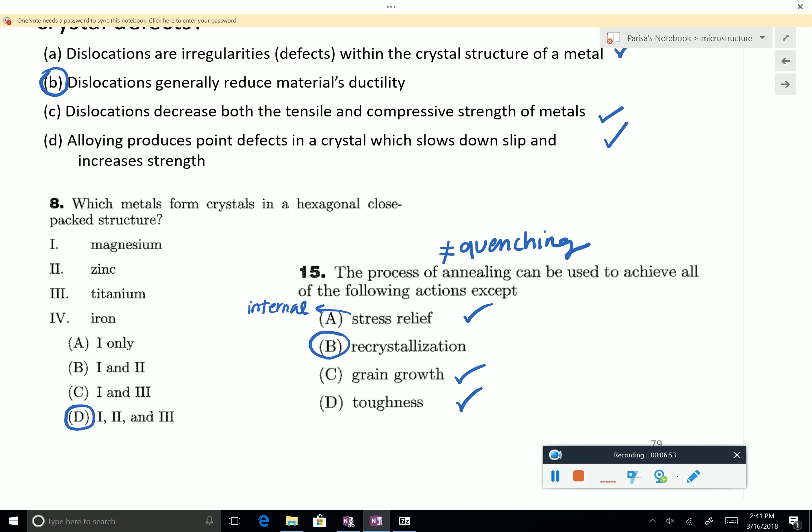And these are from the FE exam again, these questions, the materials section. Any questions about this small kind of quiz, these questions? Okay.

So we can move to steel. I told you that from today on, basically each packet will be on a different material, which matters to us as civil or architectural engineers.

From now on we can rely more on the textbook, because we're moving more from the science part of the course to the engineering part. Chapter 3 of the textbook, plus the additional reference on the syllabus and chapters 9 to 11. I had asked you to watch a video on steel production, so we don't spend too much time on the details.

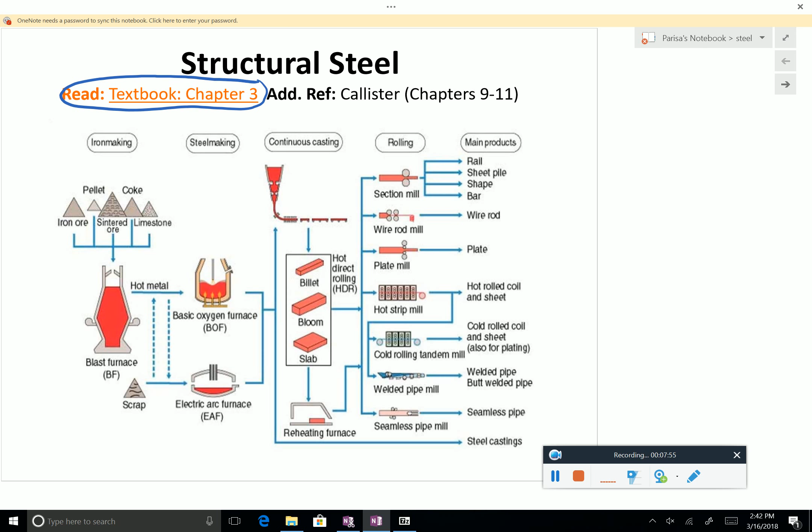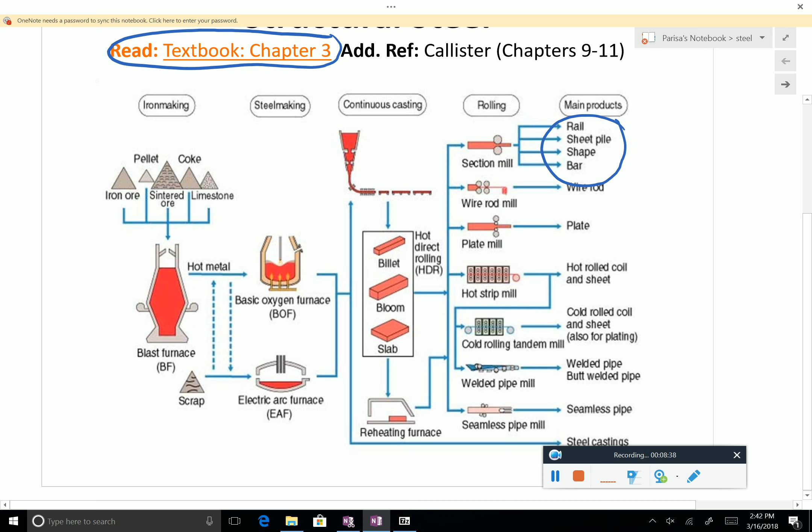This is a diagram which summarizes steel production. The first step starts with the raw material, iron ore. You enrich it to get high carbon pig iron, then change pig iron to steel, and afterwards make steel products. There are different ways to do that, and the types of products we're interested in are mostly made by hot rolling, as you can see here.

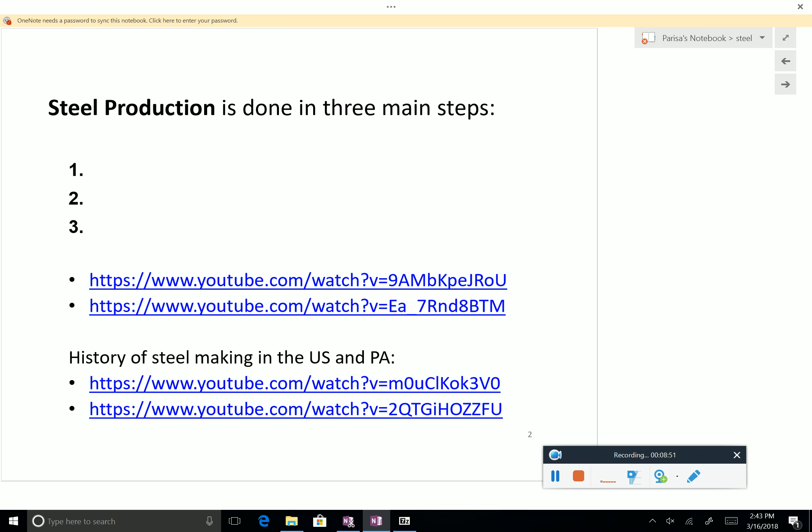So if you want to summarize steel production, you can consider 3 steps. I don't know how you categorized this in the diagram you submitted, but these are the 3 steps I see in production: you start with the raw material, iron ore, then enrich it to get high carbon pig iron, then refine the pig iron, reducing the carbon to go from pig iron to steel, and finally you make the product.

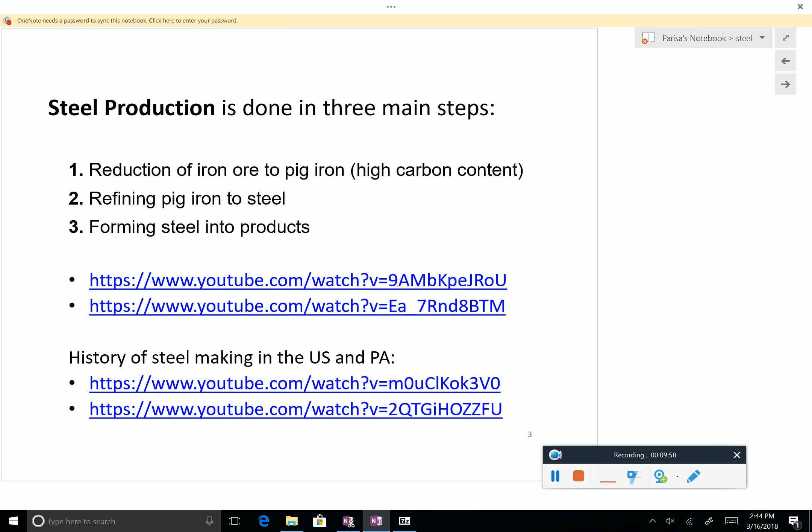So now we look at each of these steps a little bit, very briefly, so we have a good summary.

The first step is going from ore to pig iron. You increase the iron content to about 65%, and this is done using coke or coal in a blast furnace, as you saw in the video, in order to release the iron.

Another important aspect you saw in the video is the use of limestone powder, so pay attention to that. It's used to trap the impurities, which are skimmed off the top of the molten material, and then the molten rock at the bottom is collected. This is a summary of the first step.

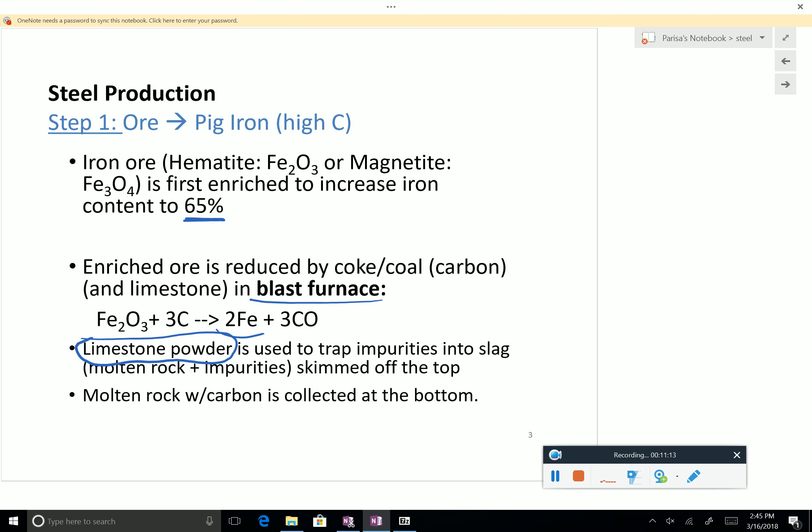The second step is basically reducing the carbon in pig iron to get steel. Why do we want to do that? Why not just use pig iron with high carbon content? Because it's a very brittle material. Exactly—remember, the more carbon we have in steel, the higher the strength but the lower the ductility. We don't like to have a lot of carbon.

So to do that, you use a different furnace, the basic oxygen furnace. Oxygen reacts with the carbon, getting the extra carbon out in the form of CO2, and then you have steel. Scrap metal goes through a similar process in the electric arc furnace. Since you've seen the video, I hope you can visualize all of these steps—it should be easier for you.

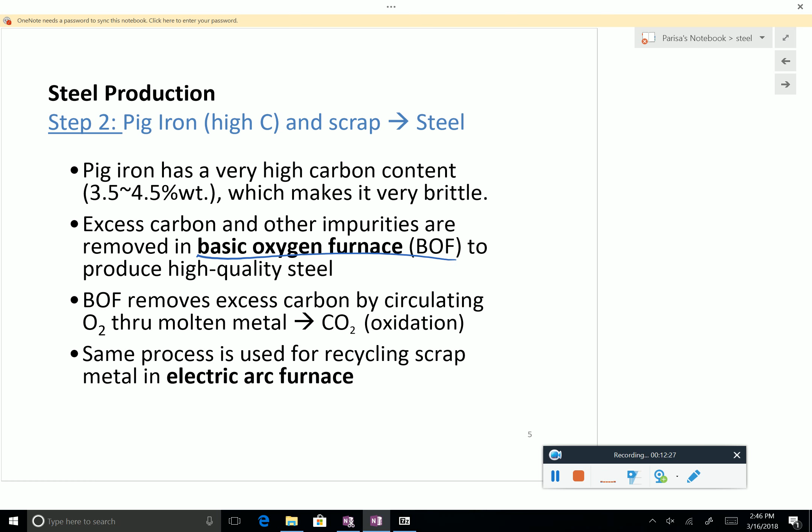And finally, you have the steel, and you need to get the products that you want. Most of the products we're interested in are hot rolled, but there are other sorts of production, which again you've seen in the video—continuous cast, or hot working.

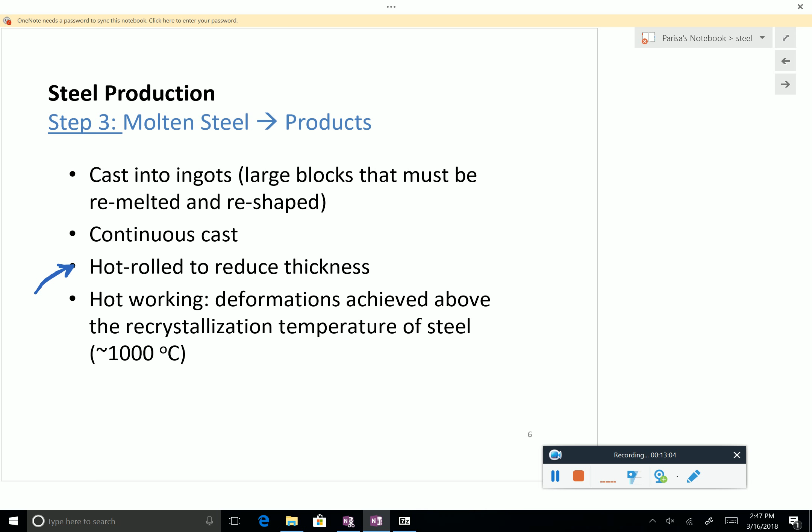So with that, we can actually move to the steel properties.

I thought it's good to ask—how many of you are fans of the Steelers? Three, four, five, six, seven. I guess the rest are Eagles fans or neutral. This semester Eagles fans are very empowered by the Super Bowl, but in any case, that also shows the role the steel industry plays in PA—just the name of the Pittsburgh team. I thought that's just interesting to note.

So, structural steel. What we are most interested in, of all types of steel, is of course structural steel, because we are either civil engineers or architectural engineers in this class. It turns out steel is the third most used construction material.

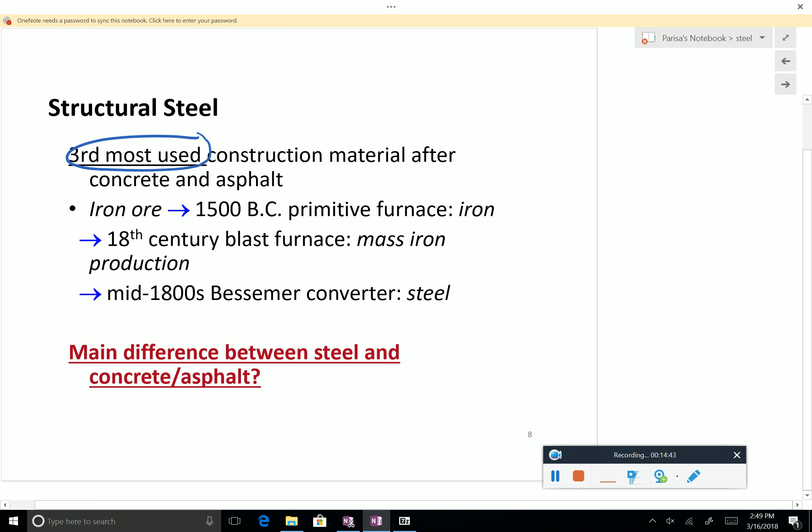Concrete is number 1, then asphalt, because there are millions of miles of road. Steel is not something new—iron ore was recognized by humans many years ago, iron played a big role in the Industrial Revolution, and steel was a later development.

So what do you think, if you compare steel as a material to concrete, let's say—what do you think the main differences are?

Let's think about construction. Concrete is a really weak material in tension, but you can put reinforcement in it. Well, it's still steel. Concrete's a lot heavier when it comes to the amount needed to produce the same amount of strength. Exactly.

Good points so far. Any other difference between concrete and steel as construction materials? Concrete and asphalt are made on site, and steel has to be made in a factory.

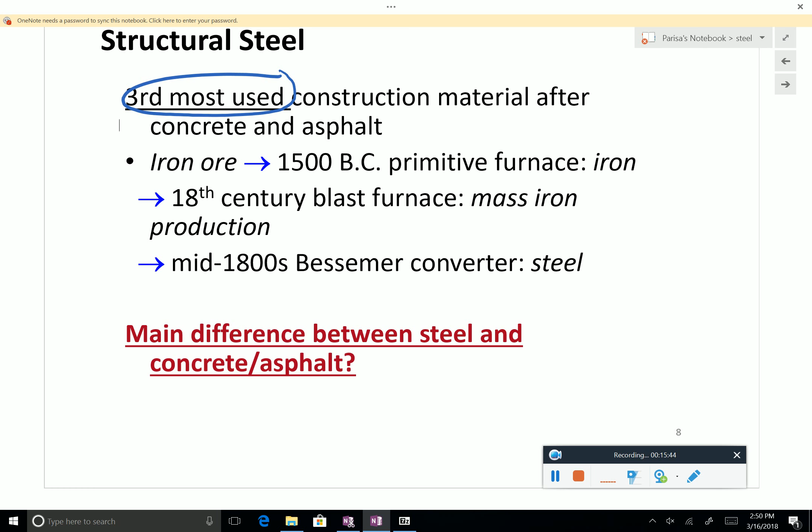Exactly. So it turns out that I was not as creative as you are. The main difference between them that I've listed here is pretty much following what your friend said. Also, every other point mentioned is also valid. One very main difference between steel and concrete is that you make them on site.

Most of the time, you can also have pre-constructed concrete elements, and these are transported, so it's off-site. In other words, as civil engineers, we can control all the properties of concrete and asphalt pretty much within reason. But steel pretty much comes in a catalog, so you buy it from a plant. In most typical projects, you cannot define or design your own steel.

So this is one major difference, but everything else you said is also valid. It's true that steel is much better in tension, concrete is weaker. It's true that there is steel in concrete. And it's also true that for the same strength, steel is much lighter, and it's more expensive also compared to concrete.

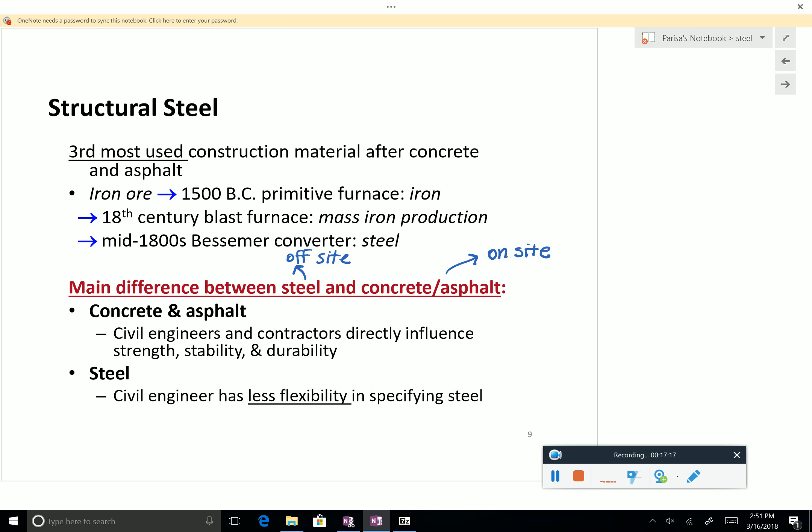In any case, steel is used in a lot of different applications in construction. I know you are juniors, but I guess you have seen girders and beams at some point in your life, maybe? So these are typically hot rolled and continuous cast steel. You are using them as load-bearing structural elements.

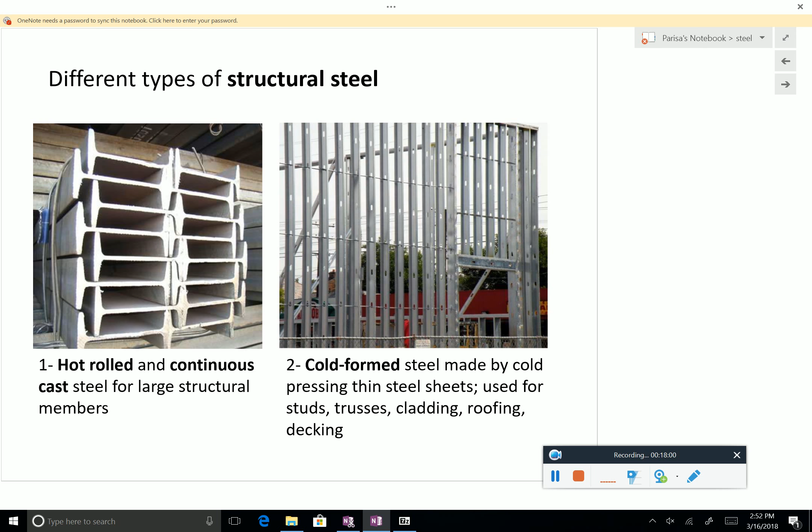And then there are cold formed elements, like this cladding, these sheets that you also use in different functions in construction. This is a building, I forgot which building. This was in construction at State College. Right now it doesn't look like this anymore, this is a few years back. So if you go to any construction site, especially if the skeleton is made of steel, you can recognize a lot of steel elements. Where else do you think steel is being used?

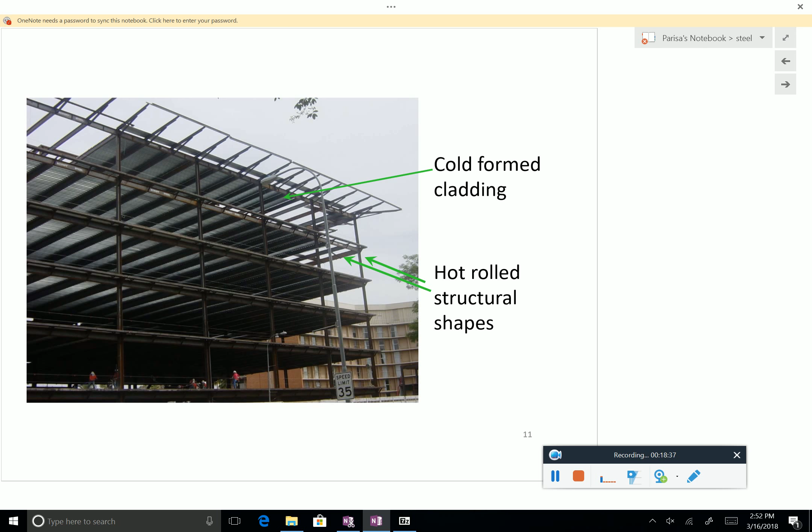A little bit less obvious. Let's say when you look at a bridge in Pittsburgh, since we have a lot of Steelers fans, you see all these bolts, and I forgot, is it an Andy Warhol bridge? You can see the big bolts when you walk over the yellow one. Is it called Andy Warhol? Steelers fans from Pittsburgh? Yes.

So fastening products, bolts, nuts, rivets, they're made of steel. We just mentioned that inside concrete, the reinforcing elements are made of steel. And there are all other kinds of steel elements which you can find in a structure. So steel is an important material.

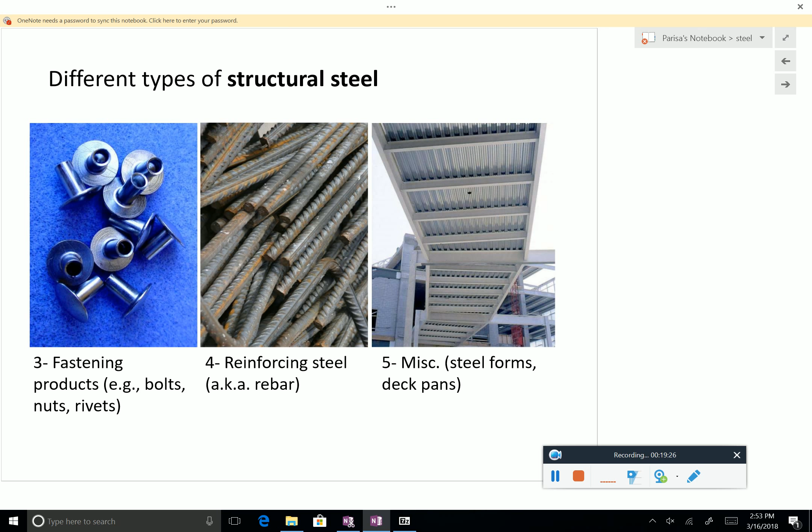One thing that everyone in this class has to know is that steel is an alloy of which two materials, namely? Iron and carbon. So we all need to know for the rest of our life that steel is an alloy of iron and carbon. You will see that there are some other alloying elements, but they're at lower percentages depending on the application, but this is pretty much it.

Because, why? Why we don't like to use very high carbon steel in the structure? Yeah? Exactly, because it's brittle.

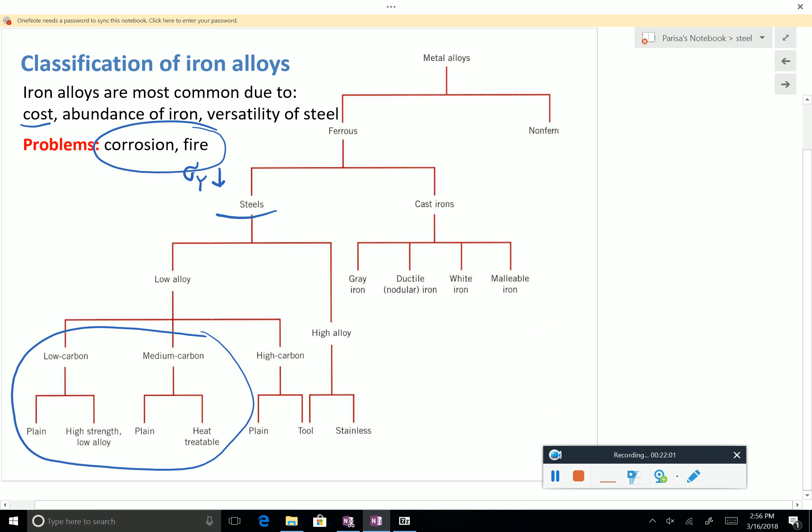Exactly, you use yield strength. So the yield strength becomes very low at high temperatures, and then the material can fail. So these are the two main issues with the steel.

So the main sentence is steel is the alloy of iron and carbon. If you have higher carbon, will steel strength be higher or lower? I'm emphasizing higher. Ductility? Lower, exactly.

And how about modulus of elasticity? It turns out that modulus of elasticity doesn't change much if you change the amount of alloy. The reason is the amount of alloy is very small, so it doesn't really change the interatomic forces as much. So the modulus of elasticity stays pretty much the same.

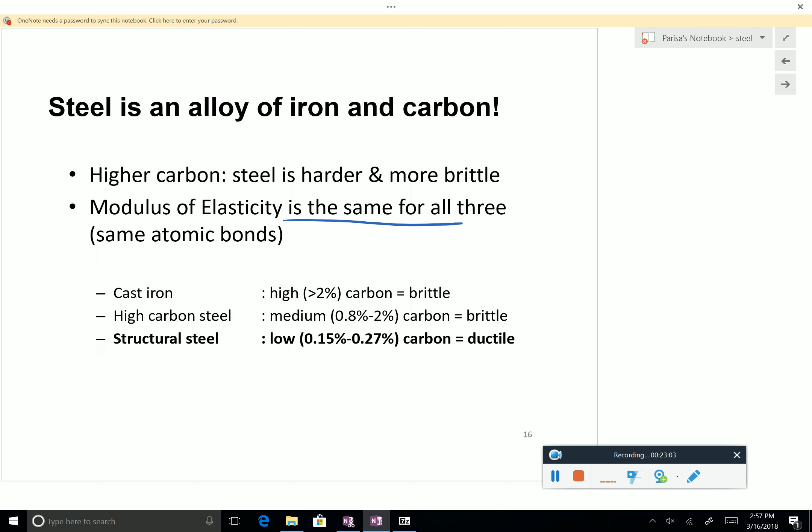Here in the side note, we'll get back to this again, but just remember to have an idea. Structural steel has a very small amount of carbon, less than 0.3% carbon, and it gives the ductility. If you have more carbon, the material becomes more brittle.

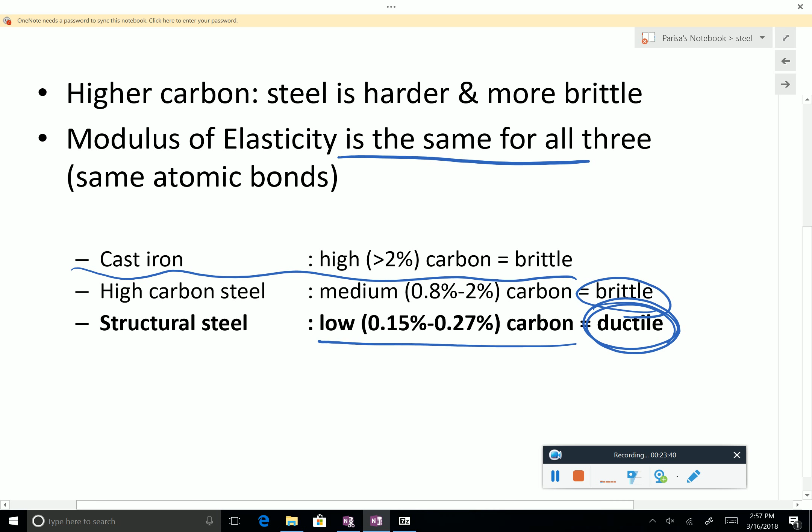And cast iron, you may have heard of it. Cast iron is very high carbon, very high strength, low ductility. This is just to remind you why we are going to have the same elastic modulus, because these interatomic forces are not going to be that different.

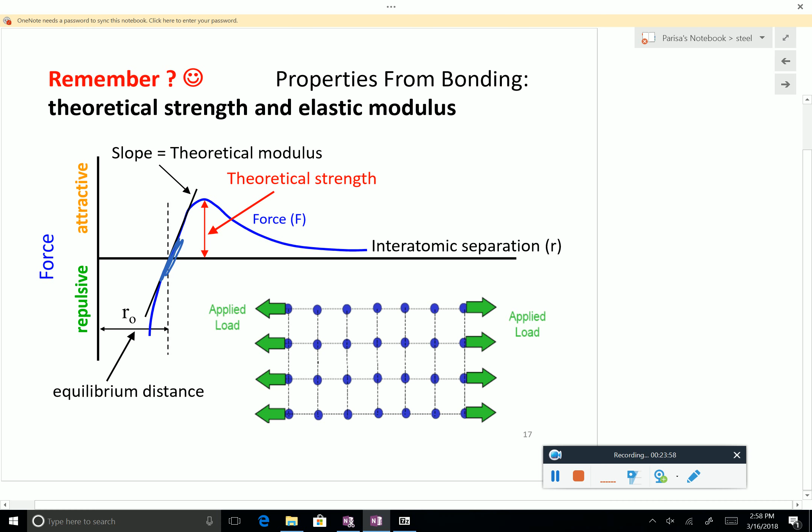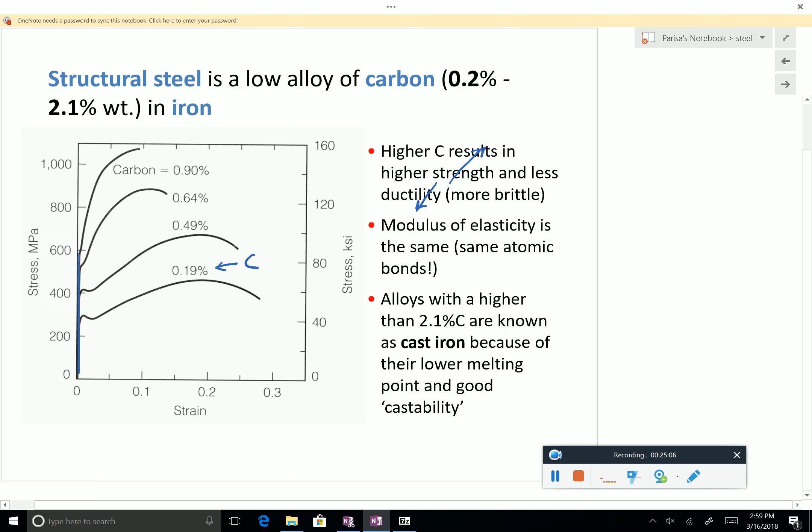So I thought we could do a simple exercise together. Imagine I ask you to draw the stress strain diagram for two steels: one has 0.1% carbon, the other has 0.6%. We know three things: modulus of elasticity is the same, higher carbon means higher strength, and higher carbon means lower ductility. So let's see if we can draw these two diagrams. There is a reason I'm asking you to do that, and try to make sure you are showing the initial part nicely. I want to see how you draw it.

Talk to each other, please, don't work alone, discuss it.

Joe, are you just drawing? Draw a stress strain diagram for two carbon contents. Imagine I asked you this on Monday. Very probable. Just qualitatively, how would the stress strain diagram look like? I'll try to show the beginning a little bit better than in this.

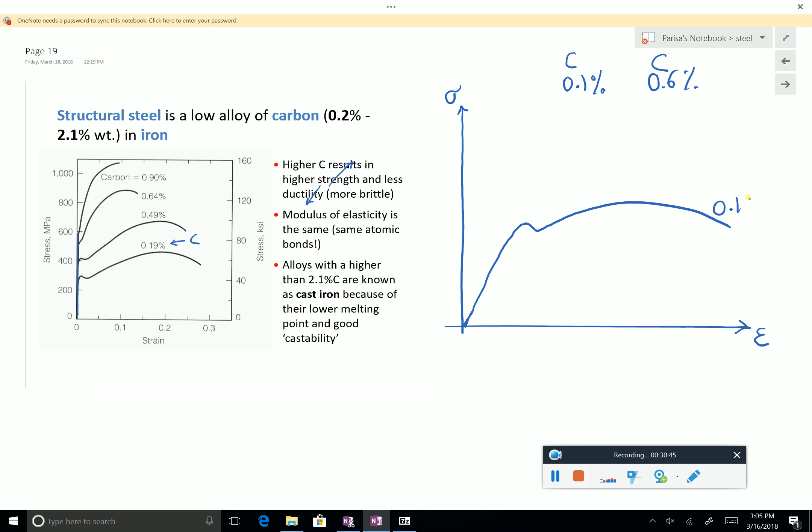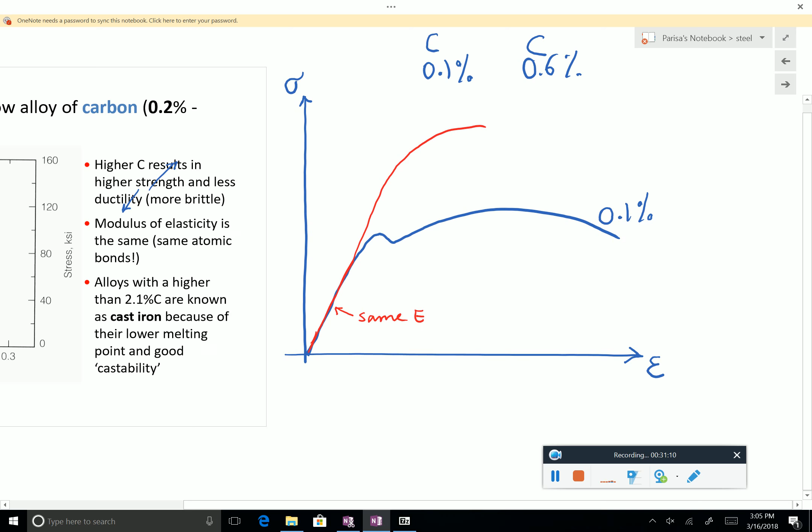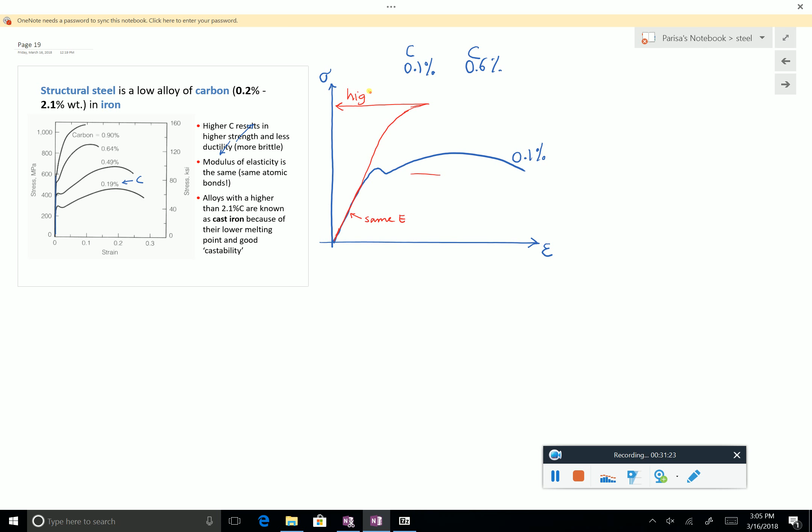Great. So if this is 0.1%, it's relatively low carbon, so you have a nice curve. The reason I wanted you to do this is that this means they both have the same elastic modulus, pretty much. This one has higher strength and lower ductility. Why is it moving?

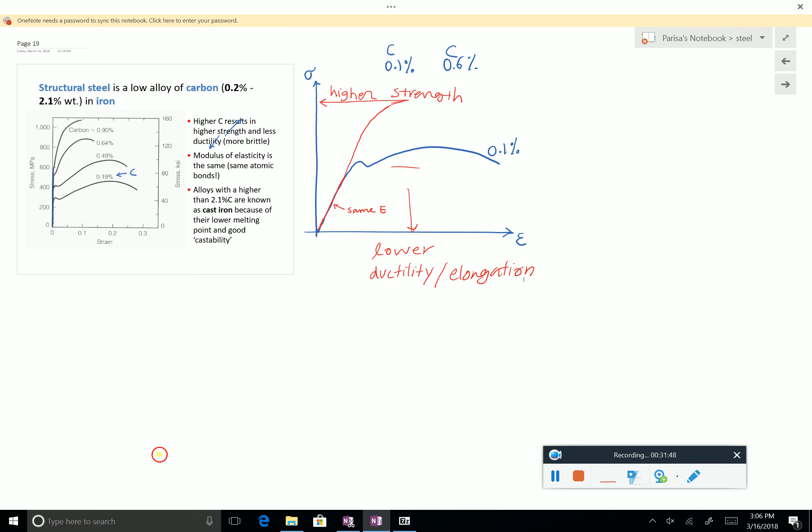Okay, so yeah, the reason I wanted you to make this plot is because this beginning part is not really clear, and it's kind of important when you see these three differences between the two cases.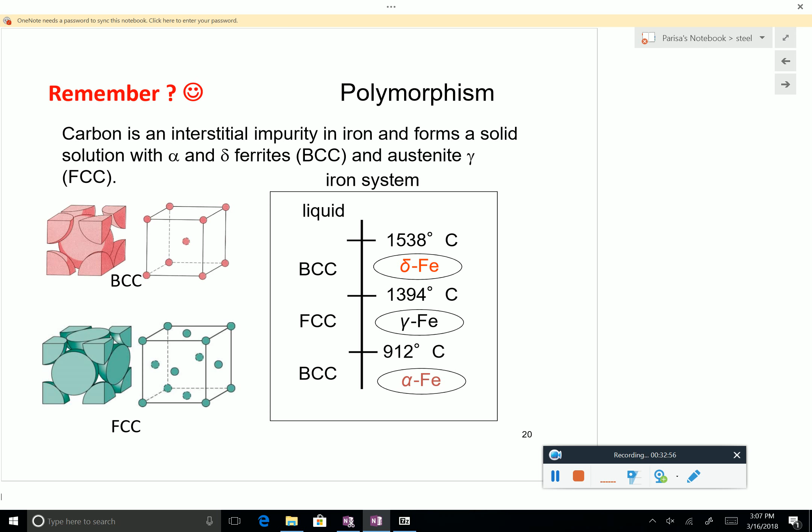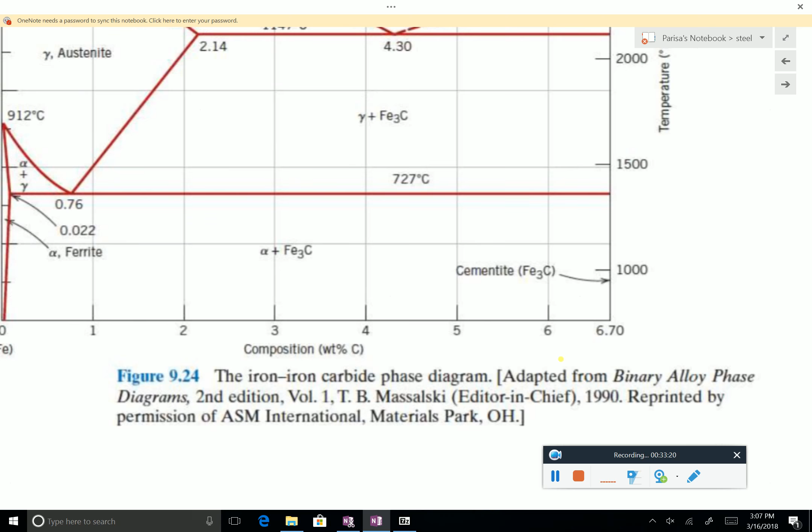Now, there is a concept I'd like you to pay close attention to. It's very simple, but it's kind of maybe very new to you. It's called a phase diagram. People have developed these diagrams to see, for a certain amount of alloying, let's say here carbon, at what temperature what type of phase we have in the molten mix.

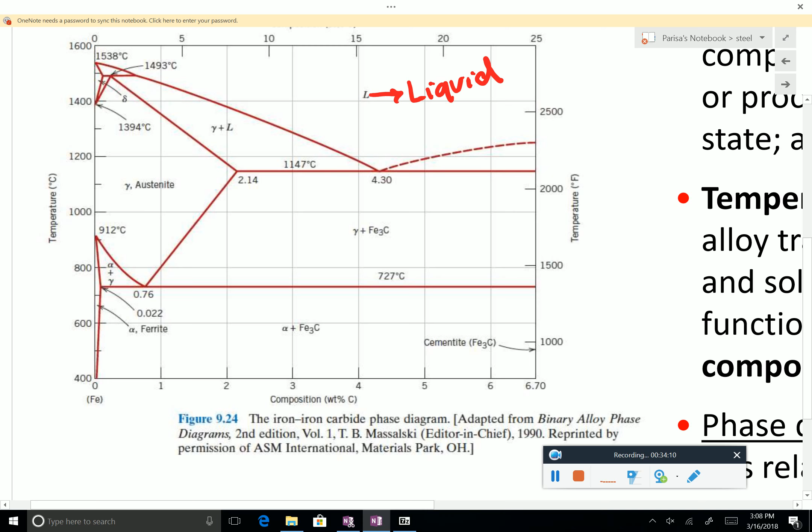So what does this mean? This means that if, for example, you have 3% carbon at 600 degrees centigrade, then you have basically these two phases, alpha plus Fe3C. If you have 4% at a different temperature, then you have a different phase. That's why it is called a phase diagram. L in the phase diagram is the liquid, this is the molten metal when it is in the liquid state.

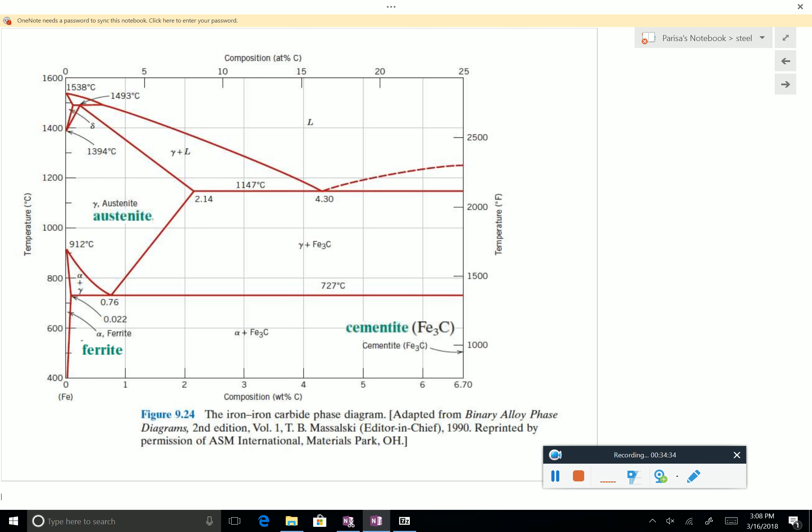So people have measured these, and you have these kinds of phase diagrams. Again, one axis is the percentage of the alloying element, the other is temperature. Maybe it's best to look at an example a little bit later, then you can get a better sense of what is going on.

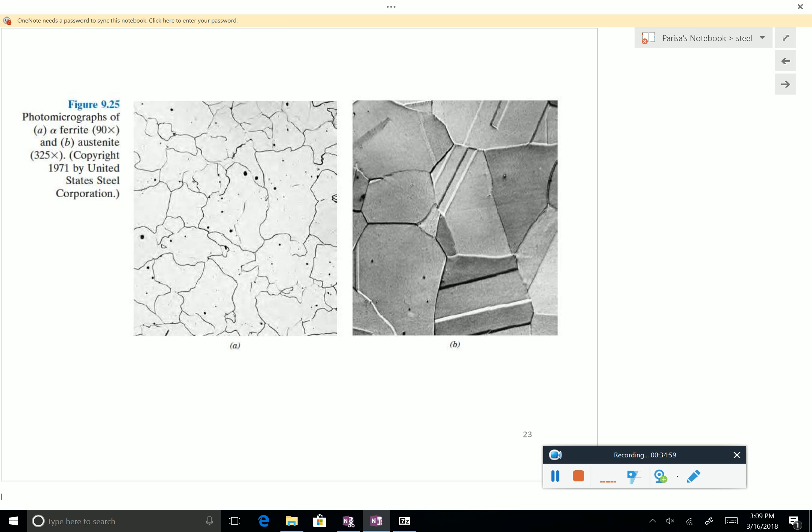Why does this matter to us? Because these different phases have very different properties. You are looking at two different phases of iron: one is ferrite, and the other is austenite. You can see that the microstructure is completely different. These different phases, depending on the microstructure, also have different characteristics. If you have, for example, more Fe3C, then you have higher strength and less ductility.

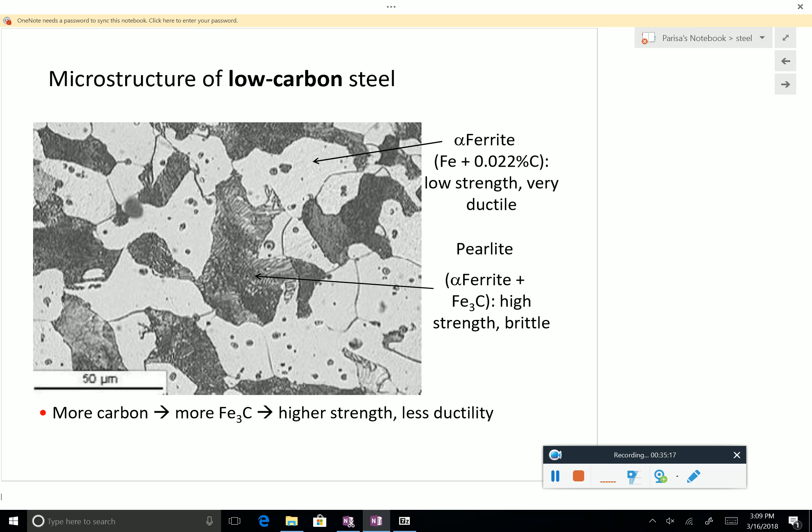Now, in the FE exam, sometimes there are questions about this, and I think these questions are very good for us to understand exactly what a phase diagram is. So let's start with this one.

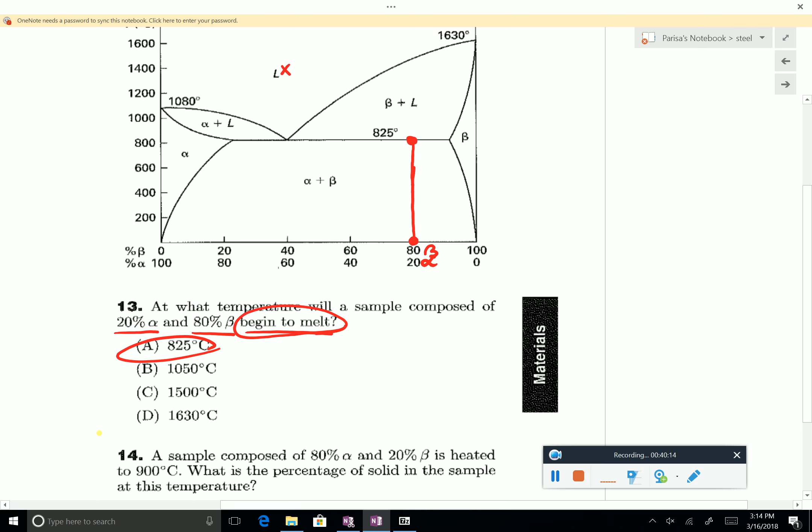And this is kind of what it was looked for here. If you wanted to see when it's completely molten, and some of you had looked at that, that would be this temperature when it transitions from beta plus L to L, which is a higher temperature, probably around 1500. So here it begins to melt.

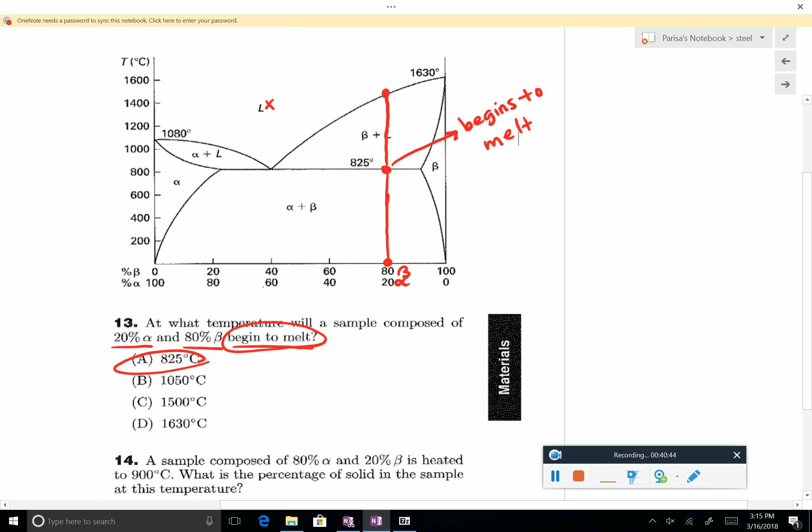Now, the second question is a little bit more interesting. We change the color. So you have now 80% alpha, 20% beta. So the point is here now. And the temperature is given as 900. So we can just find it here.

So it falls into alpha plus L. There is a solid phase alpha and a liquid phase L. The question is, what is the percentage of solid? Try to think about it a little bit before I give you the answer. So it has now alpha plus L, so it is some solid kind of floating in some liquid.

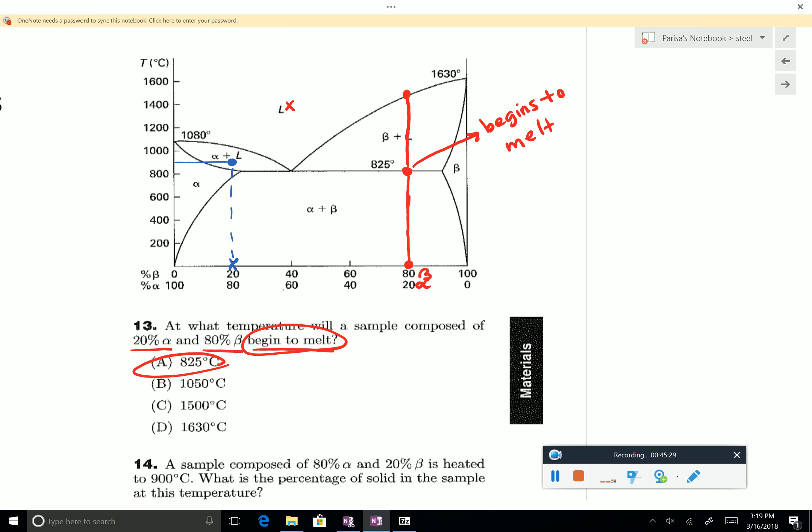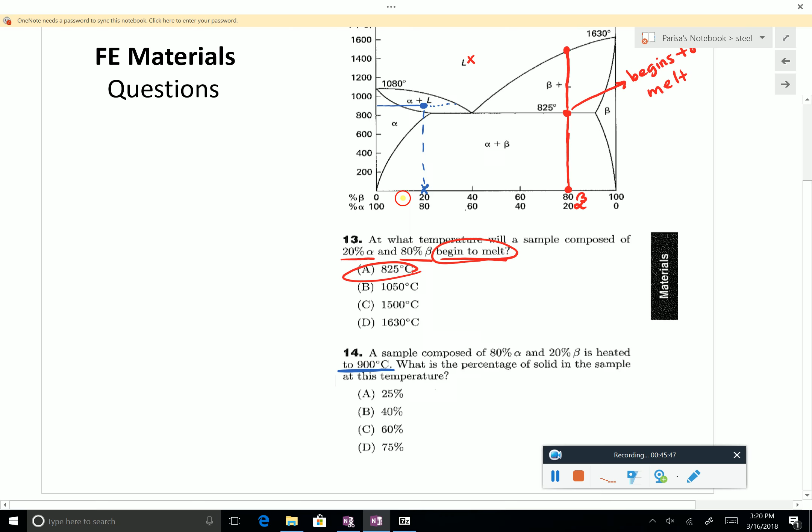Now, quickly, the way to think about it is: here the temperature is constant. So if we were here, it would be 100% solid phase. If we were here, it would be 0%. The temperature is the same, it's 900. We are somewhere in between, but we are closer to solid than liquid. So you could guess it to be just 60%.

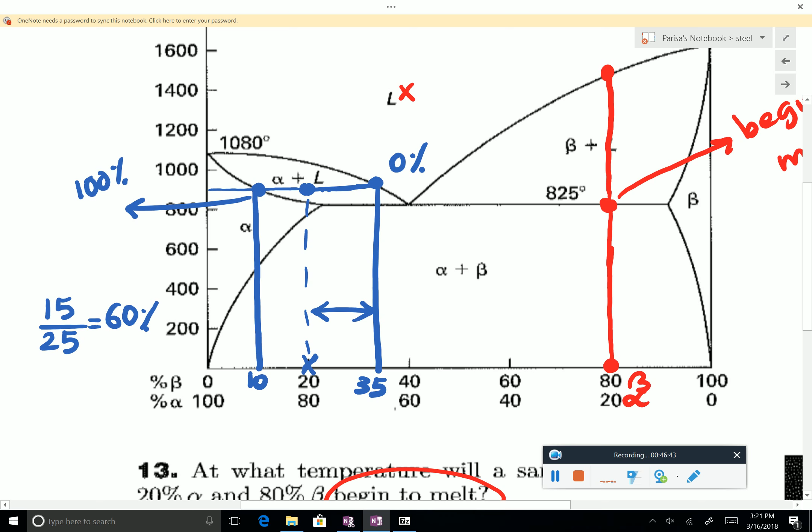But you can also look at these numbers exactly and calculate this ratio, and just say that it is closer with the ratio of 15/25, which is 60%. I have a nicer way: you can just look at those two points. So here is 10, here is 35. So the ratio is 15/25, and then you get the number. But intuitively, you can also just guess it.